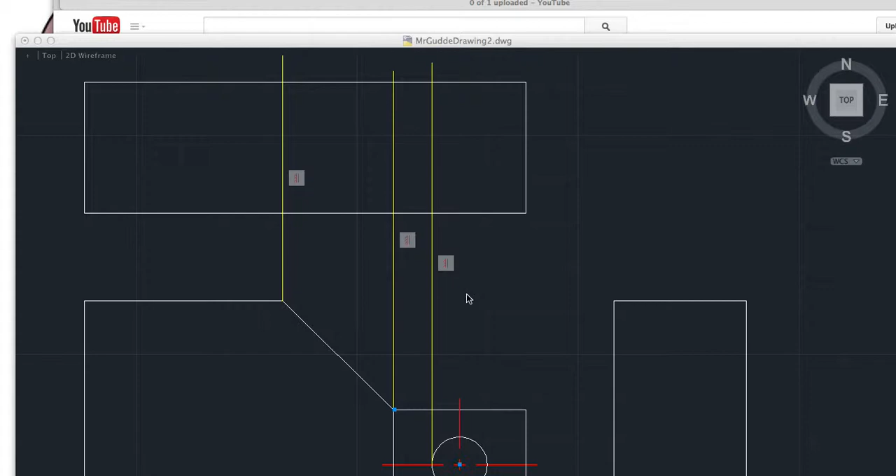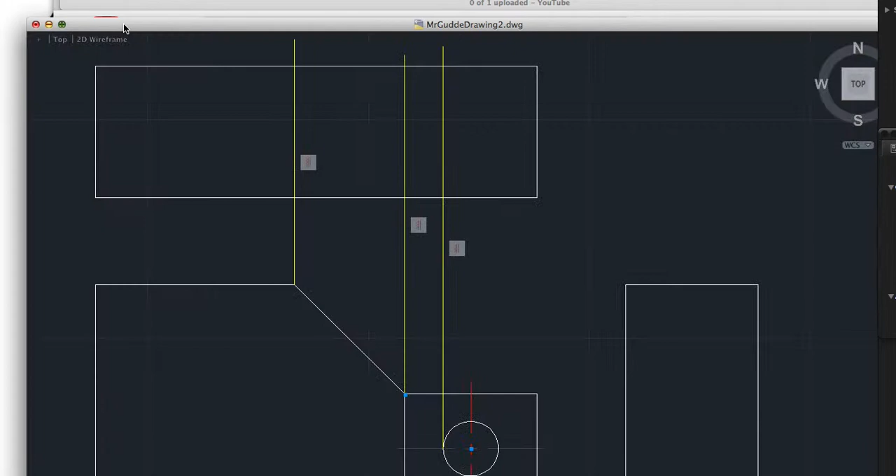Alright, I'm back. I'm going to try something a little different here. I'm going to see if I can squeeze this into our viewing area. And as I do that, where we left off was on drawing 12. Okay, and what it was is we are trying to extend or draw a line, which is

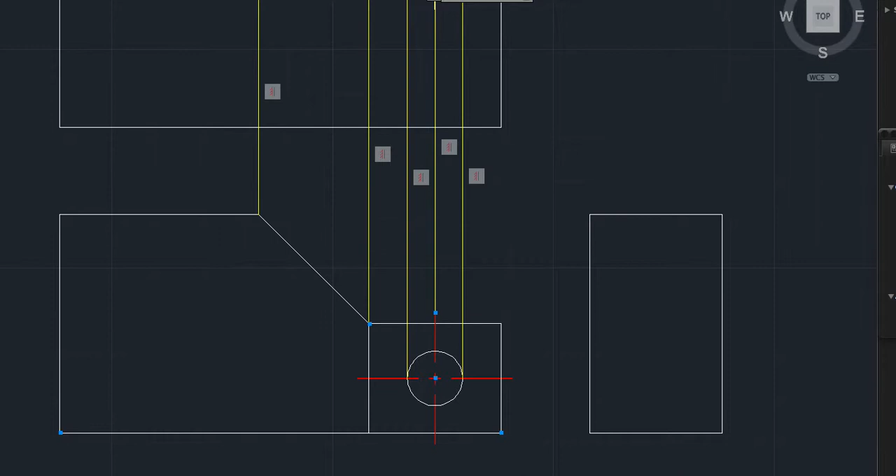our projection line. L enter, and I'm just going to go up with this. I'm trying to go straight up, escape, and I don't need to do this last one here, but I do need to do the center line, so I'm going to go right here, up. Again, be careful with the snaps. The snaps could get you in trouble, so just make sure they don't snap on these edges.

So we went up with our projection. I'm going to go ahead and go to the right with our projection line. So grab this corner, come over, escape. Again, same thing on the top and the bottom and the center line of the circle. Just click, make sure, if you notice, it'll try to grab that corner. I want to stay off of it by coming out.

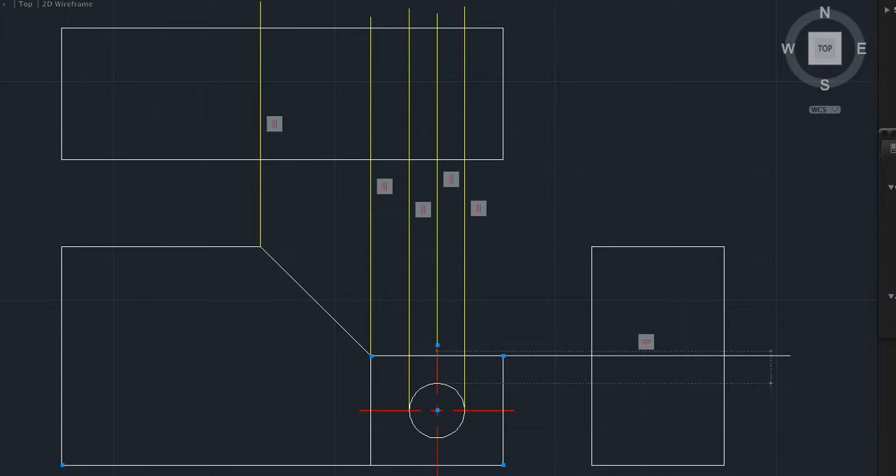Escape, L enter. I'm going to go right here. Click, escape, L enter, and the bottom of our circle. And we're going to come over and click. Okay, now we have a good start.

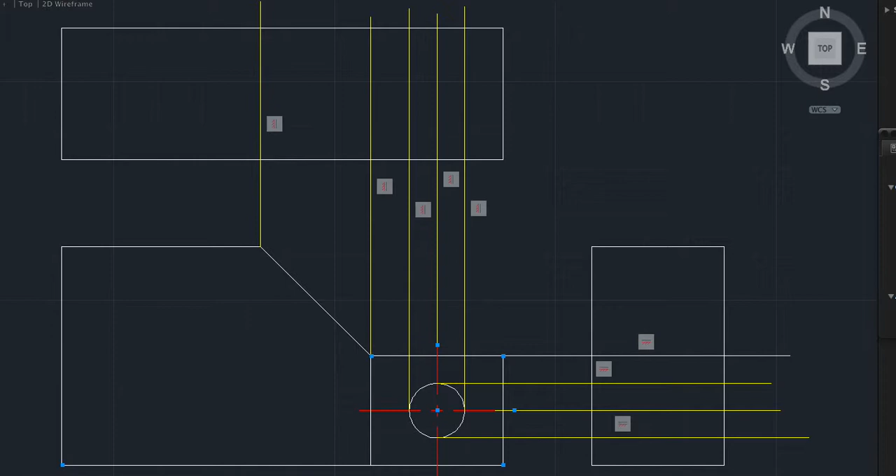Since I have all of my projection lines done, I'm going to go ahead and go up in my top right, which is my layers palette. I'm going to move these on here and make sure we go back to, let's just go to object.

Okay, up at the top, there is a line that goes right down the middle. That is half of the 1 1/4. So if I think about that, that's going to be right at 1 or 1 1/4. You divide that by half. What do we get? You do the math. Actually, it's 1 1/2. So half of that is 0.75, which you guys look at the book and you should be able to find that.

I think I have something playing in the background, so I'm going to go ahead and turn it off. Maybe.

Alright, we're back. Okay, so offset 0.75, enter, and I'm going to go to the top and go down. Since I did it to the top, I'm going to go ahead and do it over here at the right side. Always do the same thing as you do the top, go ahead and do it to the side as well.

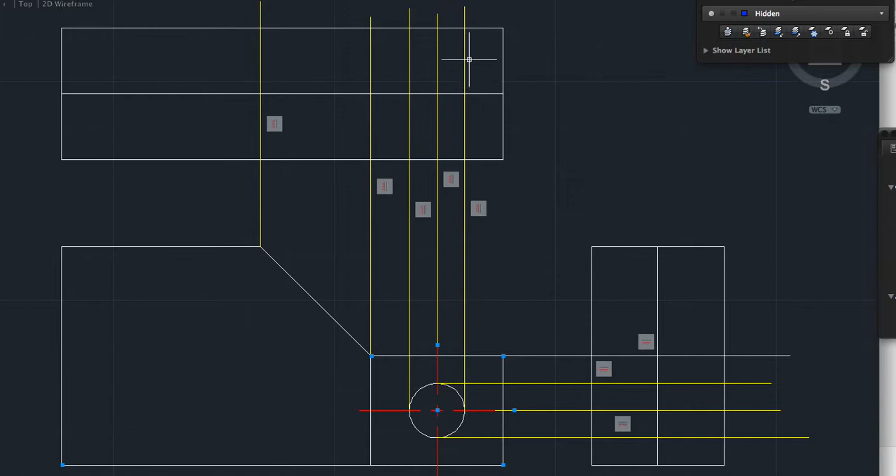Okay, now let's make sense of all this. I have this line, which is the edge of the circle, and this is the edge of the circle. We know those should be hidden lines, so I'm going to change my line type to hidden. And I know it only goes to this top. There is nothing right here, actually, so I'm going to go L enter, and I'm just going to cover these up from here to here. Hit escape, L enter, here to here.

I can go ahead and do that on my right view. Remember, whatever we do on the top, we do on the right. L enter, escape, click, click, escape.

Okay. Now I know this right here should be a center line. So I can just draw a center line, but I need to get my center line view. Click my layer center, and then L enter. And then I'm going to click, do it to the side view as well. L enter.

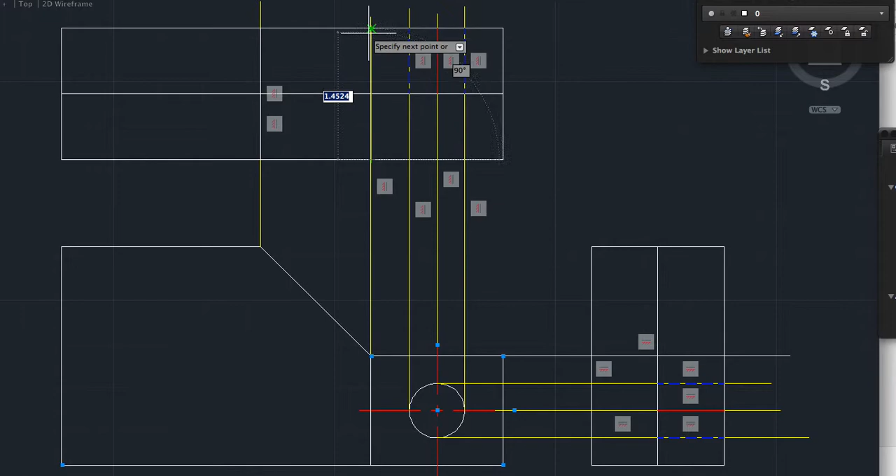Now I've got one more line I need to deal with, which is this one and this one. Well, I guess 3. This one over here. I need to do something with them, so I'm going to go ahead and get my object layer because I know they're object lines. If you look on your drawing, you'll see. So L, enter. This one goes all the way across. This one goes all the way across, and then down the bottom it goes all the way across.

Okay, now let's turn off the projection line. So I'm going to go ahead and hit Show Layer List. The easiest way to do it is just click that little button. They disappear. Now let's make sense of all of this. I'm going to hide that again. We need trim. Okay, I know there's no line here or here, and these two are gone. So I'm going to do the one that you're familiar with first because you have it in the book. I'm going to hit Trim. Upon those two lines, hit Enter, click, and we'll get rid of these two.

Now my top view is almost complete. I do need to extend, just like I did at the bottom, how I have this one little 1/8 inch here. I need to extend this down. I cannot just draw a line and make it work. I have to physically extend it. So I'm going to wait for it till I do the side view first.

Okay, so let's go ahead and trim this. Since I don't have a line going here, I do not need a line here. So I'm going to go ahead and hit Trim. Or I'm going to do it this way, T-R-I-M, trim. Most of you guys can do that. And I'm going to trim it on this line. Enter. And trim it. Escape. Now everything's right except for that little extended 1/8 inch.

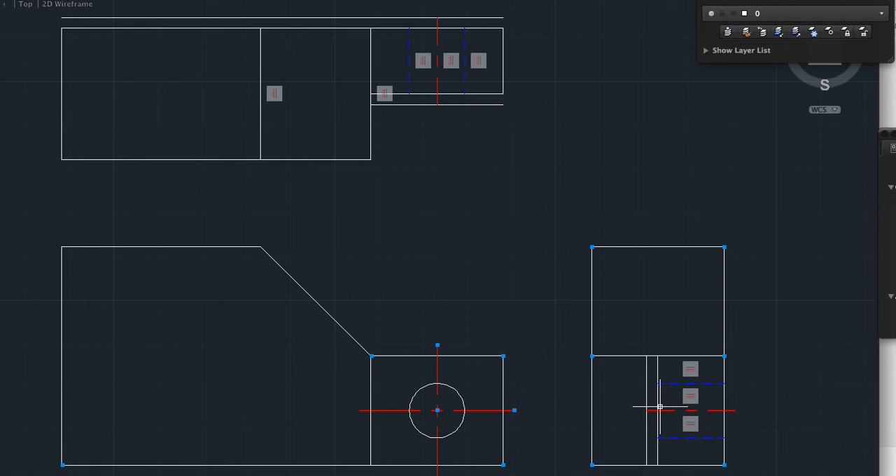All we're doing is going to delete all these lines. We click on them, hit delete, and it should be all cleaned up for you. Make sure you hit Save As Drawing 12, and then once you do that, you are good to go.